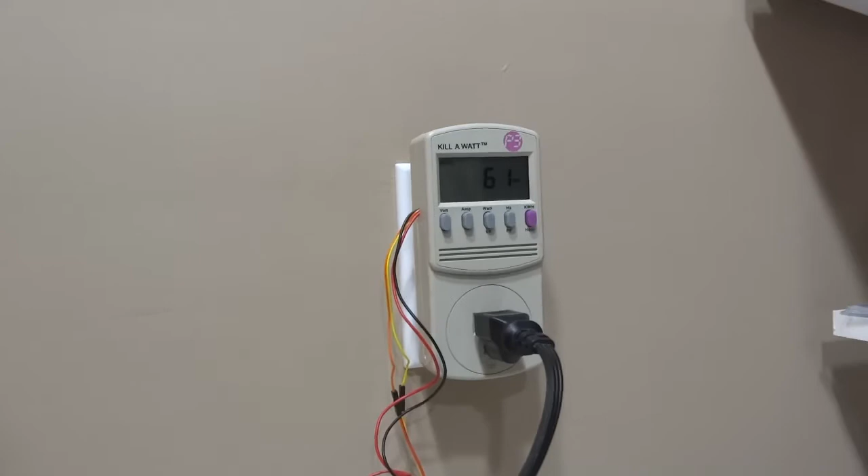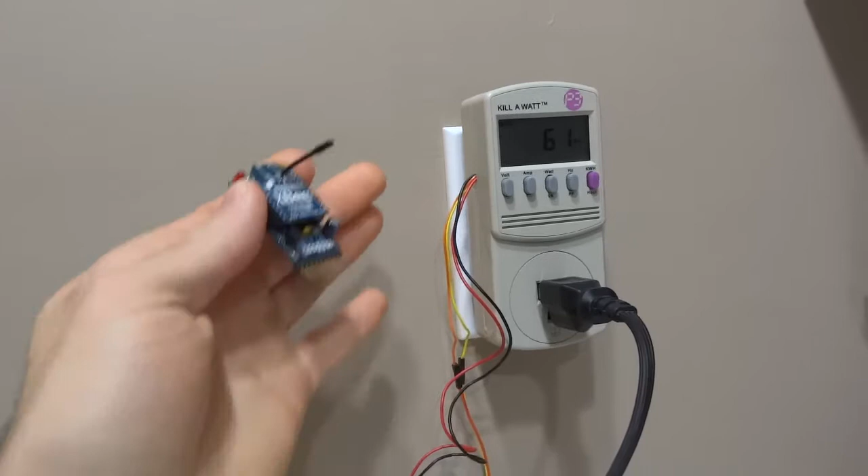What I did initially was I started with a KillAWatt kit from Adafruit.com. It looks very similar to this. It has some extra parts. What you do with that, you install it inside a KillAWatt, and it reads from an op amp the current and voltage and transmits the data every 2 seconds or so to a receiver.

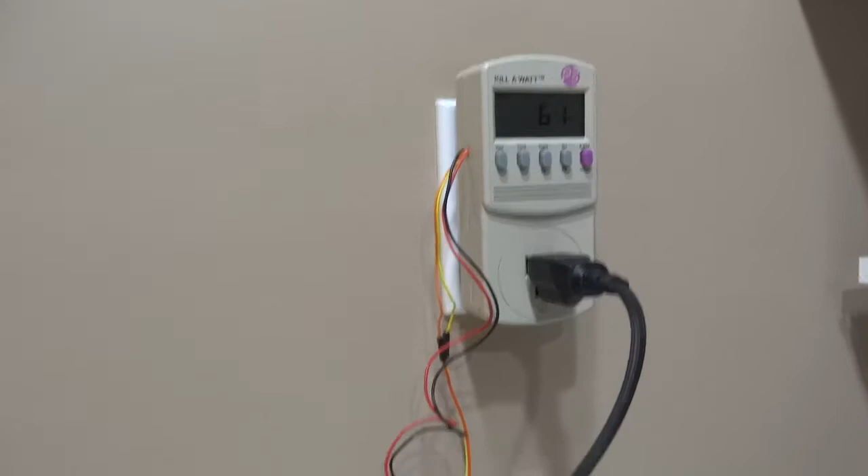Actually, in my case, the KillAWatt did not work very well at all. What would happen is, after about a minute, the screen would flicker, and shortly after it would just go blank and it would stop transmitting altogether. So what I did was I tried to salvage the situation by making my own alternative solution,

KillAWatt, and it's based on an Arduino clone which I designed for my own needs. It's an Arduino that runs at 16 megahertz, and it has a transceiver on the bottom, and this is the antenna for that transceiver.

What it does is just sample current and voltage that go through a voltage divider to bring it down to 3.3 volts, and power comes from the KillAWatt, and it goes through a Schottky diode, and there's also this capacitor that helps stabilize the circuit, and then this LED which will blink every second or every transmit cycle.

What's more special about this circuit is that it's very low power. The sketch that's running on the Arduino is sleeping most of the time. It just wakes up once a second or once per transmit cycle, and it samples data from the voltage and current and transmits it, and then goes back to sleep.

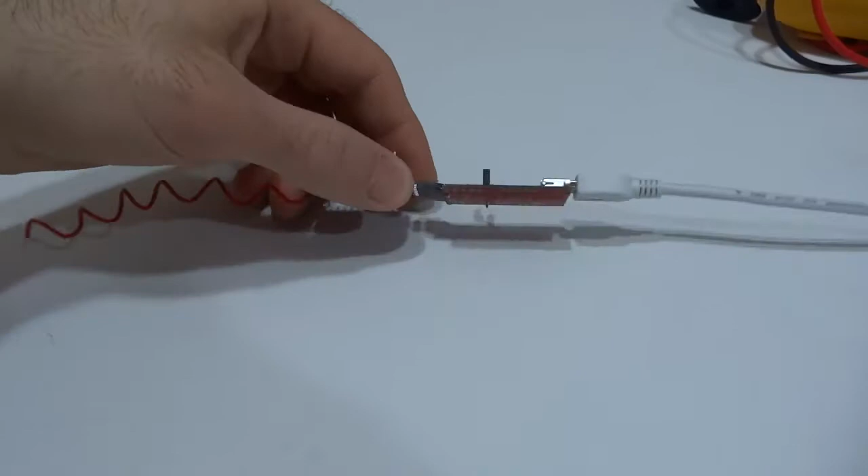And then this is the receiver end of it. It's the same node, and it has the radio on the bottom. You can see it here. It's an RFM12B running at 434 megahertz, and it feeds through an FTDI adapter into my computer.

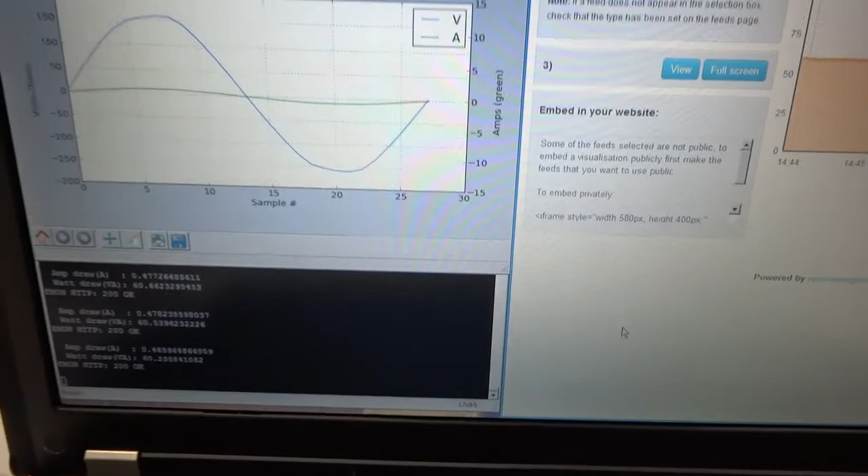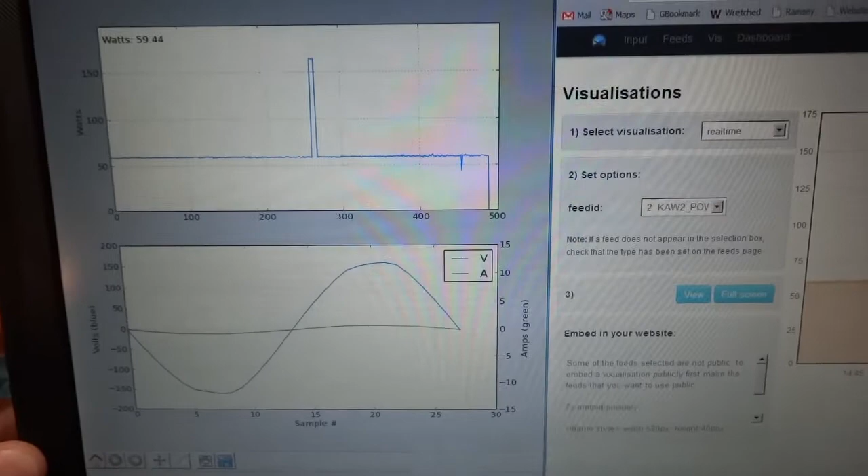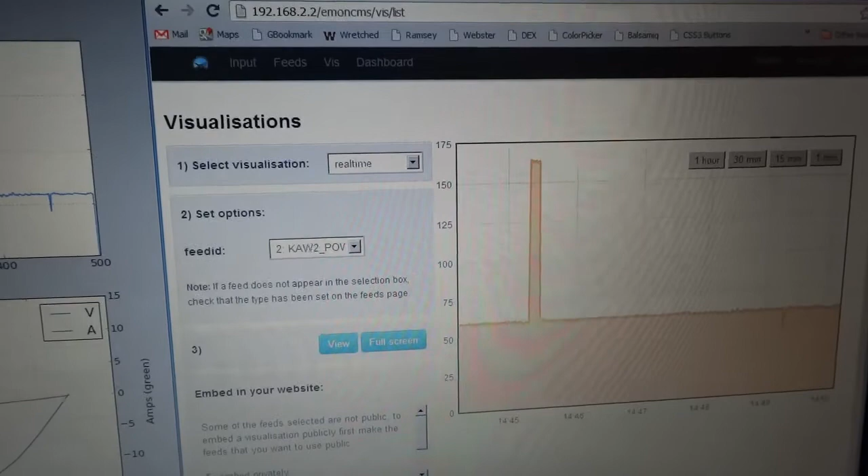On my computer I have this Python script which I adapted from Adafruit's version to read the data from the serial port and graph the power and the waveforms for current and voltage. I also added an enhancement to the script to transmit the data to my Raspberry Pi, which is running this emoncms platform. emoncms is also another way to store data and visualize it in nice looking graphs.

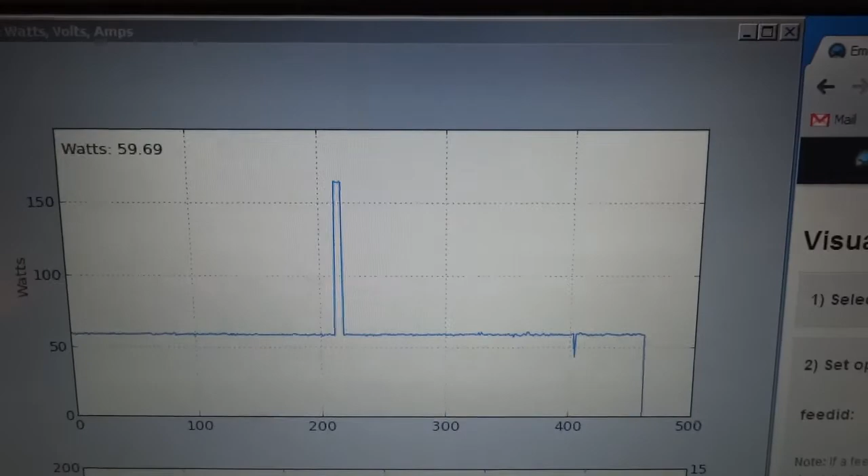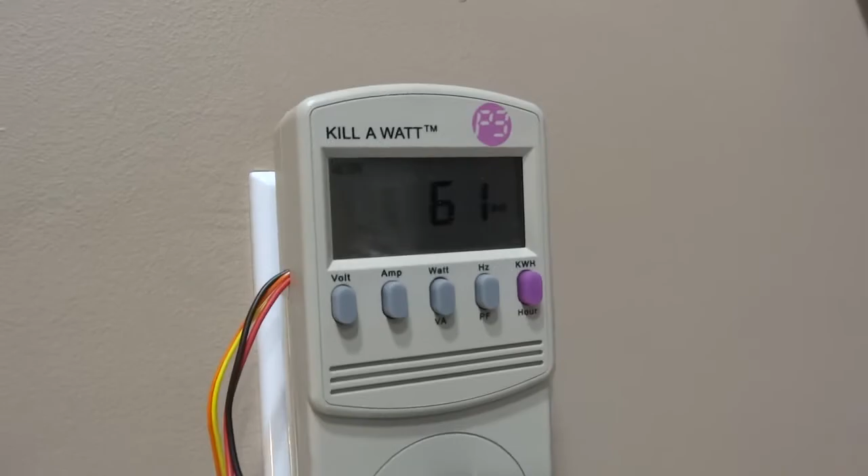You can see how I'm transmitting power to Emon CMS, and here's the graph from Emon CMS looking pretty much the same as the graph that comes directly from Python. Right now I have this fixture that I'm using to test this setup. It's only feeding this 60-watt bulb right now, which is reading 61 watts on the KillAWatt and 61 watts, or around 60, on my computer.

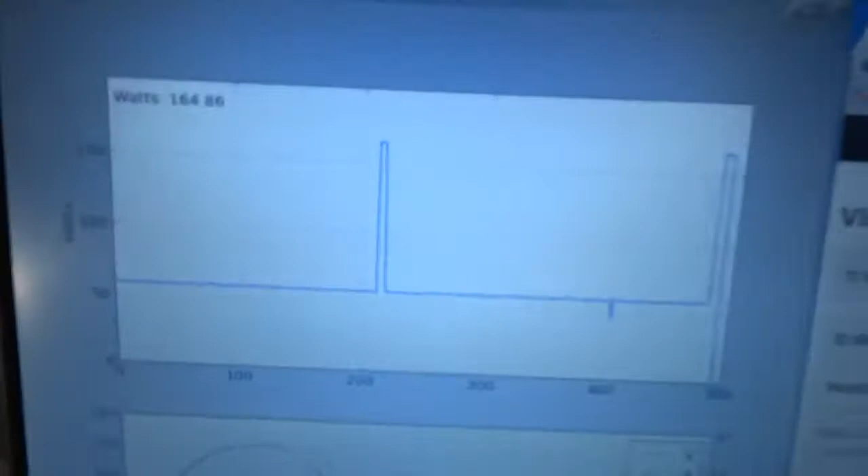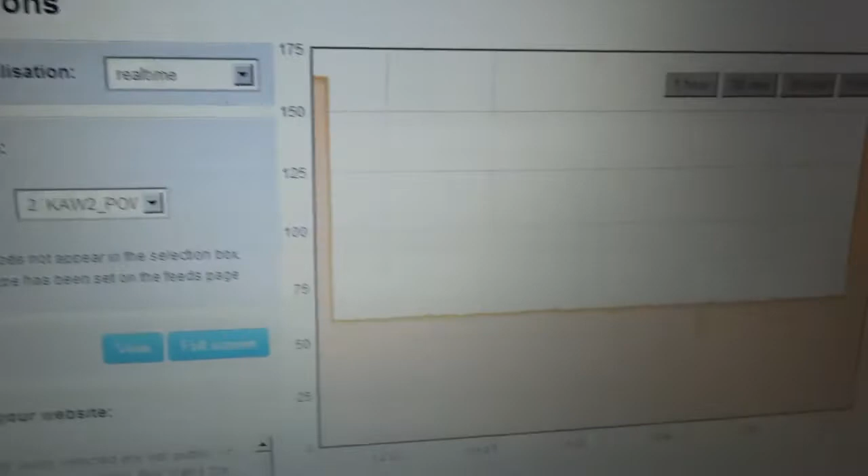So let's see what happens if I screw in another bulb here. It's 100 watts extra. So now we read 163 watts. It's reading 164 in Python. And you can see how it spikes up immediately. And you can see the same thing happening here in Emon CMS.

So this is my alternative solution to a KillAWatt that was not working very well. Anybody can replicate this with an Arduino clone and any kind of radio. This circuit is very simple, it's very cheap also. The radio only costs around $6 or $7 online. So you can build this yourself if you're having problems with the KillAWatt, or want to save a couple bucks.

Because the KillAWatt, I think, costs like 30 bucks or something like that, plus the radio. So it'll cost you around $50, and I'm just assuming here, so don't take my word for it, but around $50 to make a wireless KillAWatt using the XBee solution from Adafruit.